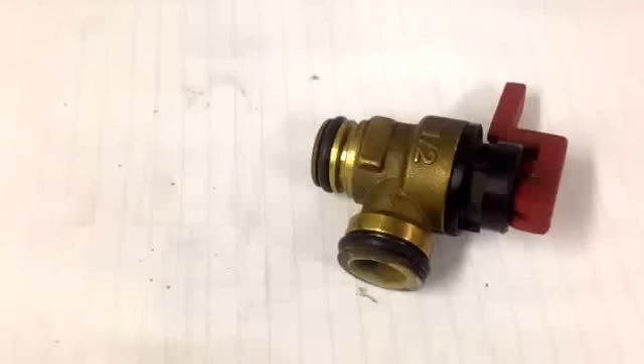Okay, we're going to have a quick look at pressure relief valves and how to stop them dripping, or how to stop them letting water out of the central heating system. First thing is, how do you know if your pressure relief valve is going or is leaking? These always pipe to an outlet pipe outside. If there's a pipe coming out behind the boiler and it's dripping constantly, most likely this is what it is.

Don't get me wrong, high level pipes are usually overflow pipes from cylinders and things like that, but what we're looking at is when the pressure drops on the boiler continuously and there's a drip from the pipe outside behind it. This is most likely what it is. Now, what does it do?

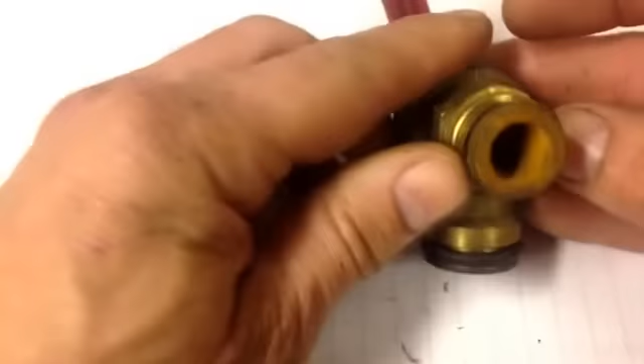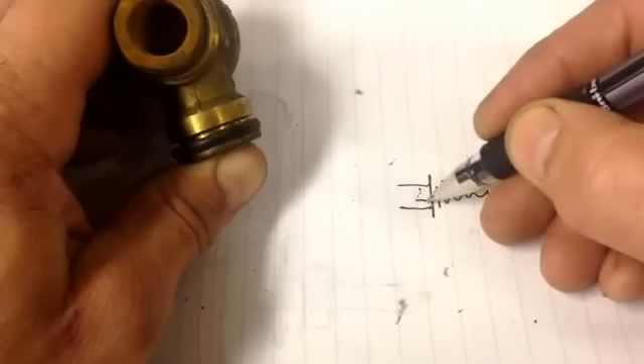Basically, this is a pressure relief valve, and what you've got in there is the tube sticking out with a little rubber washer with a spring behind it. So the spring pushes the rubber washer against the little tube here and stops the water coming out. When the pressure gets high enough, it pushes it back and it sends the water down and out. So that's there. Spring in here, washer in here, seat in there, water can come out this way.

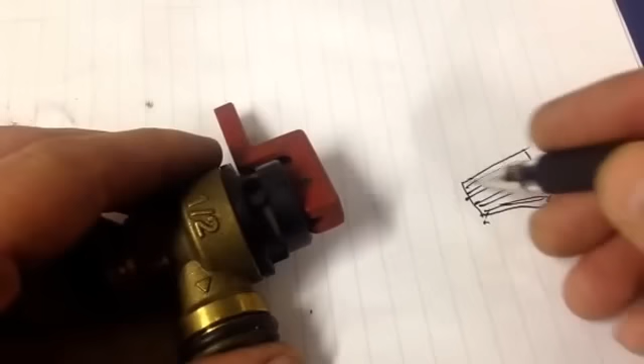This is off a Worcester Bosch. Now this isn't likely to be the one that you see. What you're likely to see is one that's got a sort of domed head like that, and I'm drawing this a bit badly, little head like that with little lines down it. So the head here is likely to look like a little red sort of dome with little lines running down it, and usually written on the top is 3 bar. Anyway, they're all pretty much the same, pressure relief valve. This one is easier to work on.

Right, so to clean one of these out, essentially this is all it is. It's a spring with a piece of rubber, so it's like a tap, but it doesn't open, it only opens under pressure. They always open, they always unscrew, like so. They unscrew from the main base. Now that makes it look easy, doesn't it? We'll look at getting them open in a minute.

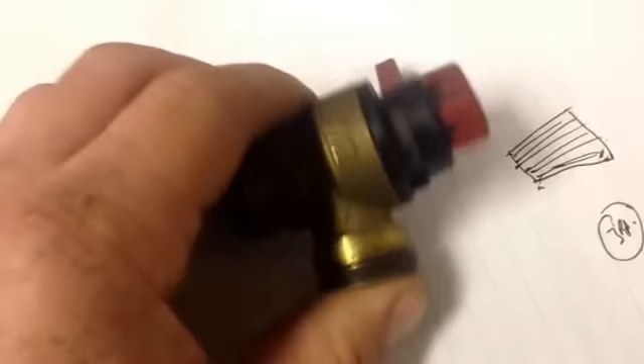But yeah, in most instances you're going to discover that you can't actually access them this way. This one especially, the most common type, you're going to find that this plastic red piece actually covers all of it, so that you can't even get anything in to unscrew the body. And when you turn the red piece, it lifts the spring away, so it pulls the spring and the washer away, and it just goes click click click as you turn it, which is lifting the spring and opening the valve.

Now obviously if you're going to mess with this, you need to make sure the system's drained, but it's really convenient because you're at the pressure relief valve, opening it, you can drain the system until it's empty. So if you wedge it open until the system is empty, you're fairly confident that you can then open it without loads of water coming out.

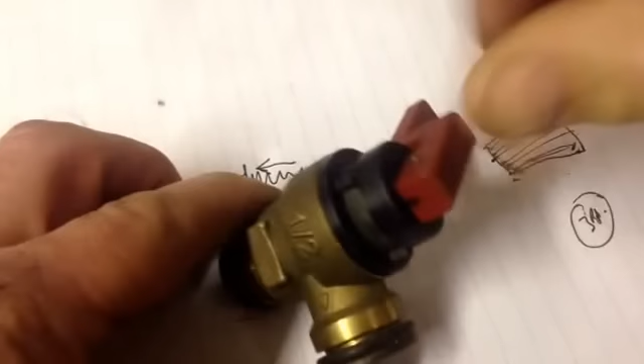The other type, you turn, and it's the same thing. You can turn it until it stays open. It's quite a careful process, but turn it until it stays open and let the system drain, because you've also got the pipe running to outside to let the water out. Convenient. So we're looking at getting it open.

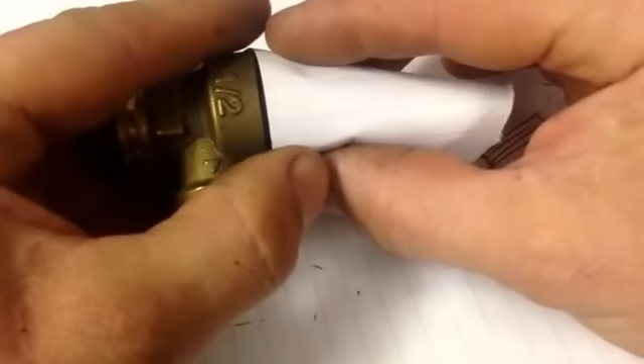Now, the other type, the type that I wish I had to show you, but don't, I'm afraid. I'm just going to demonstrate with this piece of paper. The red cap covers like that, okay? So you can't even see the piece to undo there. And you'll keep turning this, it just goes click, click, click, and nothing happens.

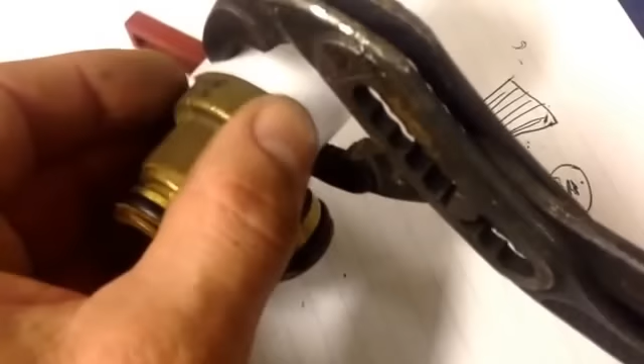So the trick to getting those open is you get your grips, and you just squeeze the edge of the red plastic there. So you just catch it. Make sure you're not catching the brass, but you just catch the very bottom of the red plastic, squeeze it in so it touches the internal piece, and then you can get it open.

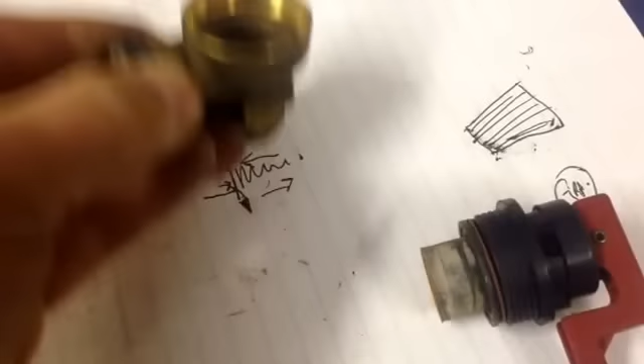Okay, inside one of these, there's not much to it. What you've got is your seat, the little piece that it seats onto, that little ring down there. You've got the spring and the rest of it, and then you've got this little top hat. Now you've always got this little top hat. This, by the way, is some form of sealing washer. You need to leave that in the right place.

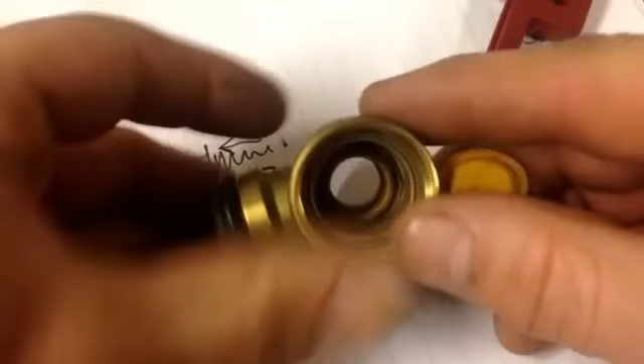This is spring loaded, obviously, so that's what holds the washer against it. But what you're looking at doing to stop them leaking is cleaning that seat there and cleaning this. Now they're really not difficult to clean.

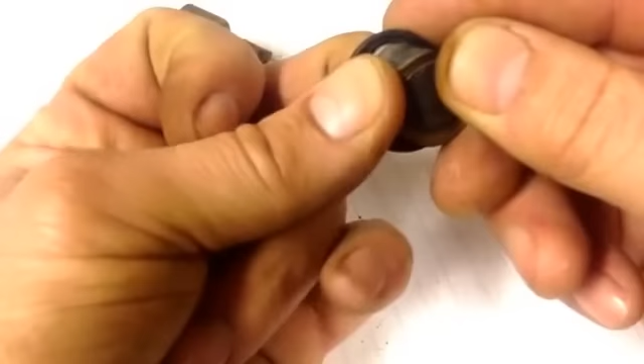You can do this with some hot running water and some soap. What you're looking for is where it's been sitting, where the piece of rubber's been sitting on that groove there. And if you look around it, you can see whether you've got any defects on it.

If you've got a chip or a little depression, you can see it, but mostly you haven't. Mostly these will be covered with some sort of scaly deposit. What's happened is it's opened at some point, this has lifted and then not gone back, and a piece of the scale has jammed between the rubber and the seat.

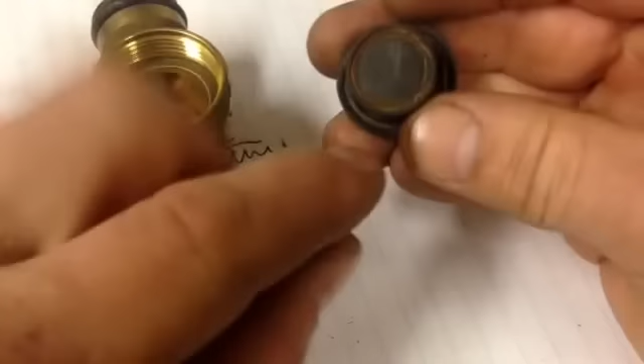So all you do is get that under the tap, get it cleaned out. Obviously I'm not going to bother too much now. Check it for imperfections, and you can get them clean quite quickly.

Don't worry about splits around here really, because there is a split there. It will leak out here when you open it, but it won't stop it from actually sealing.

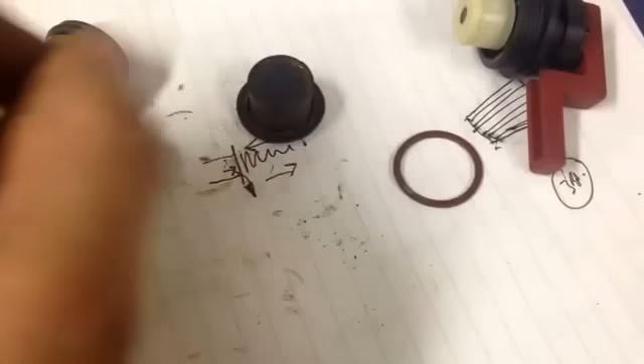Once you've got this clean and checked it, all you do then, and my favourite way, is just with a screwdriver, gently scrape the rim of that, the seating rim of it. You'll usually find that whatever deposits are on there are quite hard, and they just chip off really easily with a light scratch.

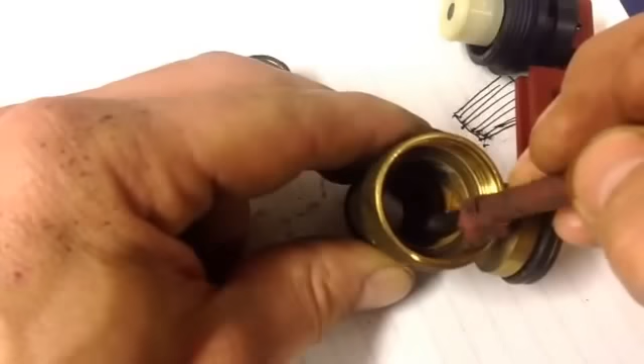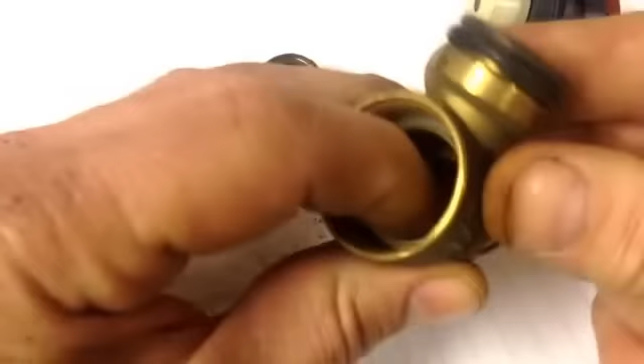You don't want to, it's obviously brass so it's quite soft, you don't want to hit it too hard, you don't want to affect it or mark it, but what you do is just go around and clean it out like that, and then maybe flush it with a little bit of water, and you can get the seat back into a really good condition really quickly.

So just look around it and check to make sure there's no divots in it or areas where that seat is damaged, and usually there's not. And then put it back together.

All you're doing is, even with the other type where it's covered, putting it back together is really easy, because you're screwing with it, not screwing against it, so that little red cap will let it tighten down no problem. So you just get hold of the red cap and screw it back into place.

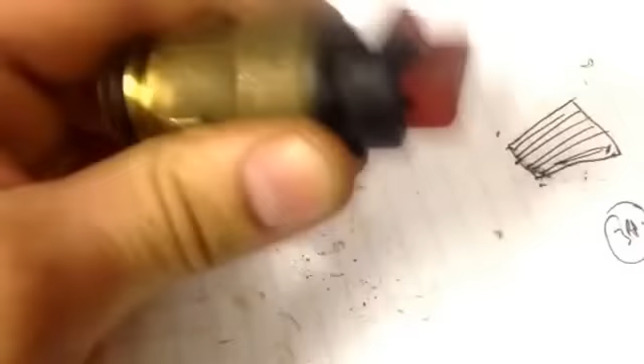Okay, some tricks. If a PRV's leaking or dripping, just snap it to get it to slam that rubber washer back down onto the seat. So if there's a little piece of scale in the way, that can smash it out, or crush it, so that it can seat properly.

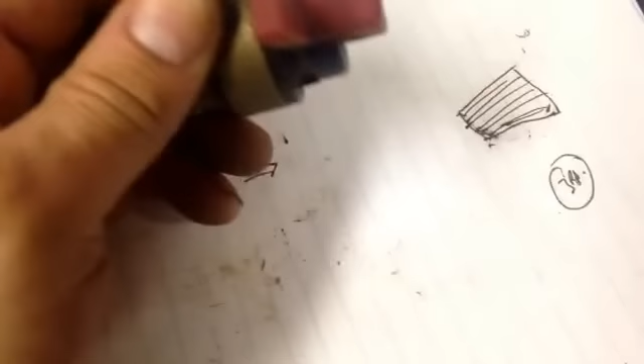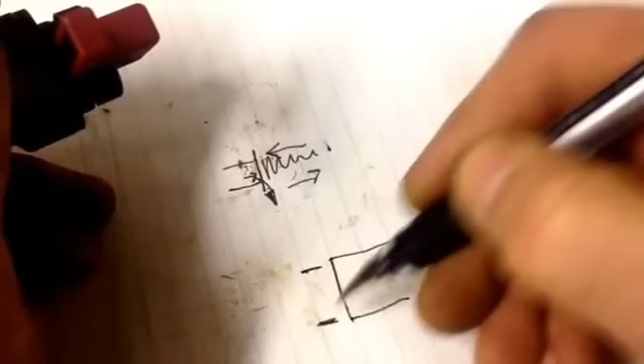The same with the type that turn. You just turn so it goes click, click, click, click, as it raises that spring away and drops it back each time. So it's actually slamming the top of that top hat down onto that seat. If there was a little piece of debris in there, it just bashes it out of the way, or crushes it up, and there you go.

The other types, you can just turn them, and that turning action lifts the seat and then drops it back down. Lifts the rubber and drops it back down. There's no adjustment needed, there's nothing.

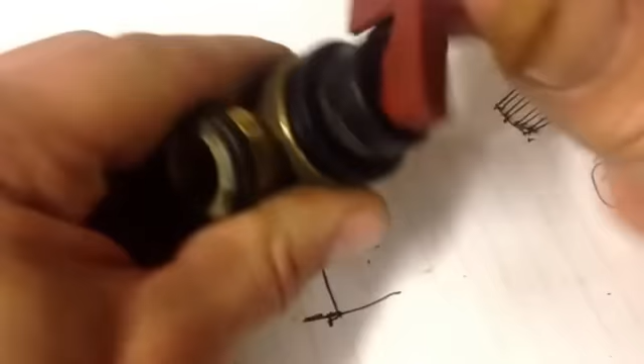These don't really break down in terms of adjustment. It's very unlikely in that instance. It's always crap in that seat down there.

Now, other things worth mentioning are these blow off at 3 bar. So if your pressure is at 3 bar, it's going to be blowing off. Don't think that that's what it should be doing, or that it's leaking at that point. If it's at 3 bar and it's pouring out, then it's doing its job correctly.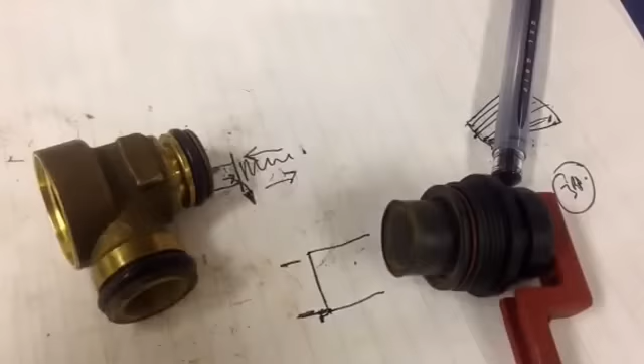Anything else worth mentioning? I suppose some of these, for example on a Megaflo, are at a higher pressure, but the principle is still the same. The only type you can't take apart are the type that are a temperature and pressure relief.

But you'll know that because it'll say it on them. Usually they give an indication of the pressure. In this instance, it does — you can just see at the top there, 3 bar, it says there.

So there we are. Quick, cheap and easy to do. And also quite safe to deal with, because under most circumstances you can drain the system from the valve itself.

So you can drain it from here, so you don't need a hose pipe or anything like that. You can just drain it out of the boiler or the system you've got, drain it down, and then take it off and work on it from there. There we are, guys. Hope that helps.